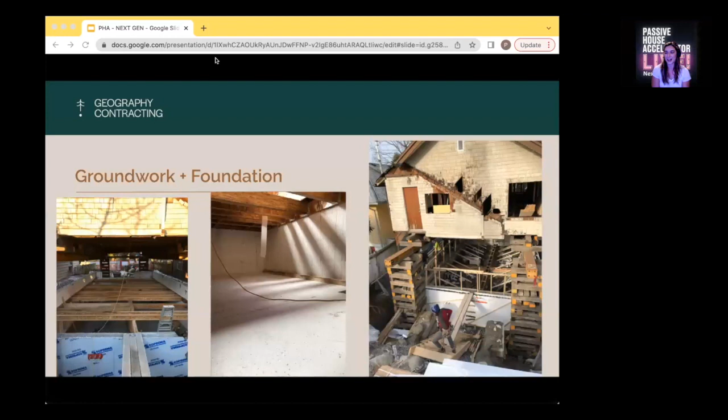15 years of experience and a background in environmental science, Paul brings a wealth of knowledge to his industry. He is a licensed British Columbia builder and active member of Vancouver's Home Builders Association and Passive House movement, implementing healthier building standards that benefit the community. Paul approaches every project with care and works closely with clients to make sure their home fits their lifestyle and needs. So with that, Paul, please take it away.

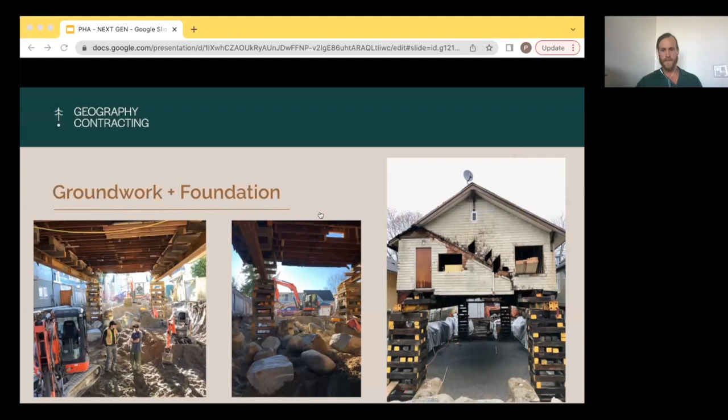insulation going in. And our slab, in this case, was one strategy of reducing concrete, which has a lot of embodied carbon in it. So we actually used a plywood slab, a 2-layer plywood slab, as opposed to concrete. So we had to ensure the substrate below the EPS was super flat, so that the foam went down super flat, so that our plywood could lay down without bouncing all over.

But yeah, we thought that was a really cool way, because it was a non-structural slab, to remove concrete out of the picture and use plywood instead. And then the third photo there is, I believe, on pour day of the foundation. So you can see the house kind of floating above.

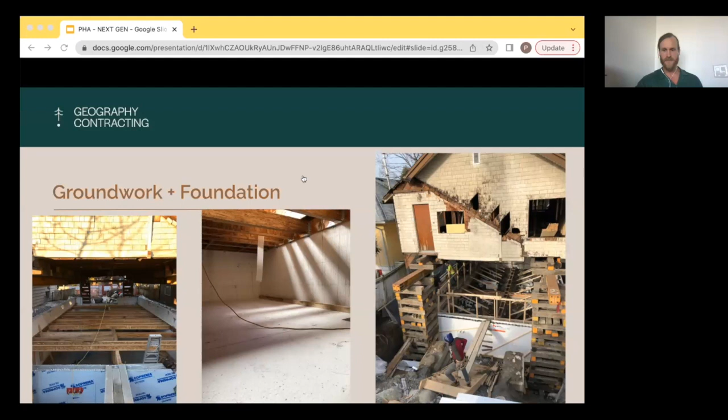Yeah, so our structure upgrades and layout changes. Turning a single family home into a duplex that would be home for 2 young families was a challenge, but we managed to squeeze 3 bedrooms and 2 bathrooms into both units while maintaining a living space that felt spacious and open.

Vancouver has a definite lack of real estate options that fill the gap between condo living and single family homes. So it's always good fun to be able to add density to neighborhoods that typically don't, and kind of fill that gap.

Yeah, so to accommodate the new layout, the structural changes were pretty big. No part of the house remained untouched. But as we deconstructed section by section, we were diligent about keeping any framing material that we thought was good enough to reinstall back into the house.

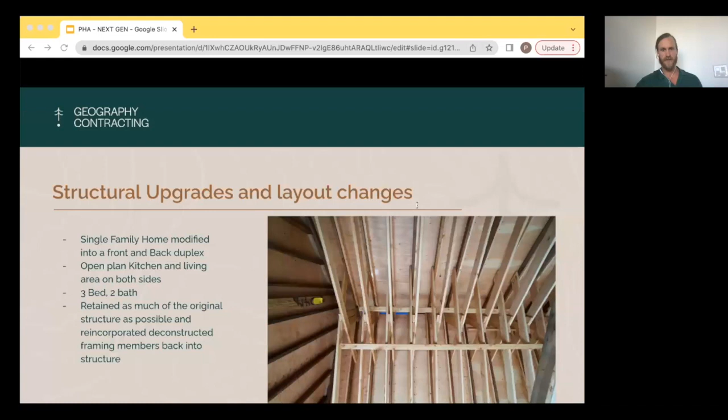So you can see in this first photo, new wood living harmoniously with old wood as we'd pull it out, and then where we could, we'd add it back in, to pay tribute as much as we could to the old structure. And here are a couple more photos of that technique.

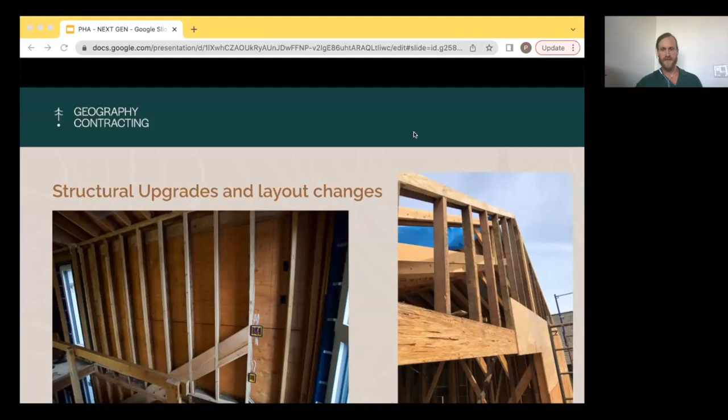Yeah, so for the EnerPHit, our envelope strategy was very typical, very similar to what we do in a new build. So here it was 2x6 framing. Usually we're 2x8 in Vancouver with a new build, but we were 2x6 with 4 inches of exterior mineral wool. We used a self-adhered membrane, which acted as our primary air barrier strategy as well.

The roof assembly consisted of 4 inches of polyiso, and then 4 inches of mineral wool, which gave us enough R-value that we didn't have to insulate on the interior, like the rafter cavities, which is kind of nice.

So yeah, a bit of the calculations here. Our heat load demand target was 15 kilowatts per hour. We managed to hit 0.3 air changes per hour. And then we put a PV system on the roof, which produced about 7.2 kilowatts per hour for both the front and the back. So combined, it was about 14.4.

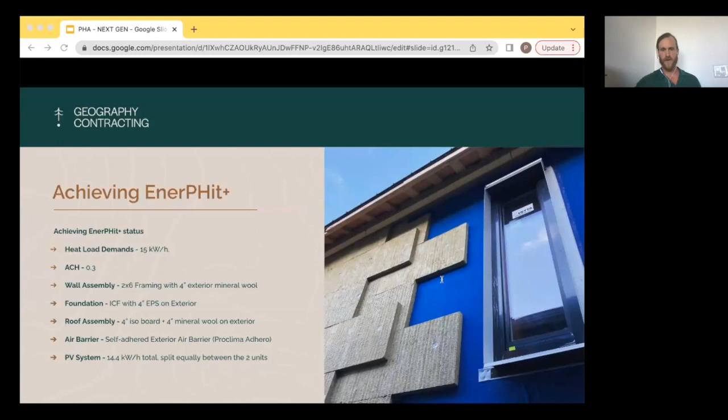And yeah, here are another couple photos of the house taking its final form, or its new shape, and putting on its new passive house envelope layers. This is my favorite part of any passive house project, because you can start to sense that the first blower door is just around the corner. So you can feel the importance of the diligent detailing of membranes and tapes, because that test is coming soon.

Our final blower door score was 0.3, which we were happy with, and very much in line with our other passive house projects. And I think it was our blower door score that sealed the deal of receiving the EnerPHit Plus designation. I think it was a bit lower than we had anticipated, which was good. And then the finished roof was a standing seam metal, which made for easy installation of our PV system, which put us into that net neutral energy consumption window.

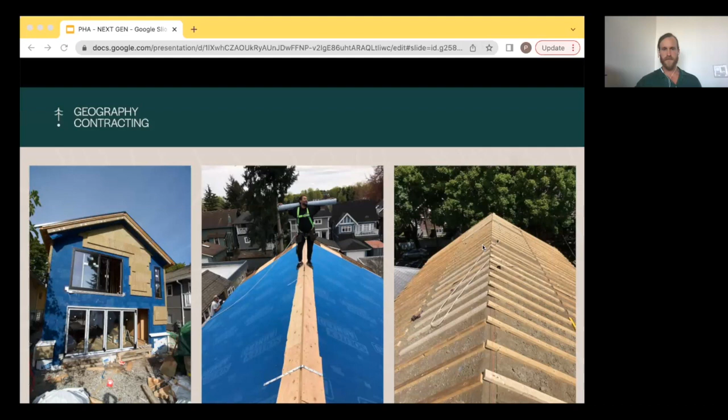So this back unit faces south. So they've really taken advantage of the indoor-outdoor feel, and we installed a 14-foot wide folding door system that floods their space with natural light. So overheating was a concern. So we do have a large canopy above the back lower opening, above that folding door. And then we installed a heat pump as well in the back unit for cooling in the summer.

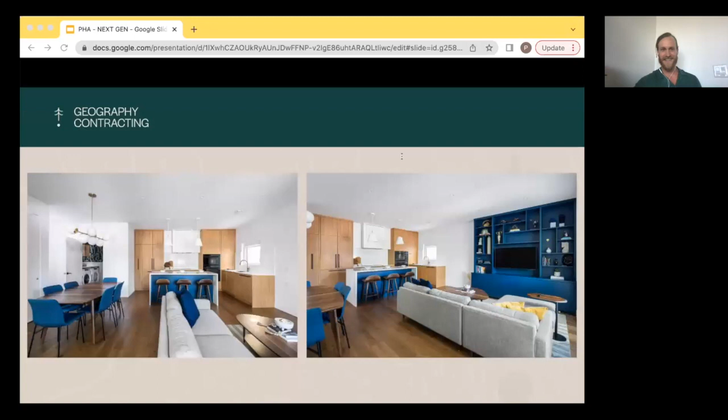So yeah, I think that the EnerPHit way of going is a very interesting and cool way of tackling the passive house requirements and achieving an energy efficient home, while also focusing on reducing embodied carbon, because inherently with a project like this, you are using less framing material. We estimated about 30% less.

I mean, most of the house was reconstructed. Starting out, we thought maybe it would be more than this, but there was a lot of reconstruction needed. The house was pretty old and in rough shape. But yeah, we still were able to save that much. Also nice to create density in a neighborhood that is majority single family homes.

And then we reduced concrete in the basement slab; we installed a 2-layer plywood slab instead, which I thought was a really great way of reducing concrete. And then, back to using as much of the deconstructed framing material as possible. We were really diligent throughout the process of setting everything aside and then reinstalling as much as we could as we framed back up. And then the PV system on the roof got us to the point that we were essentially net zero with the build.

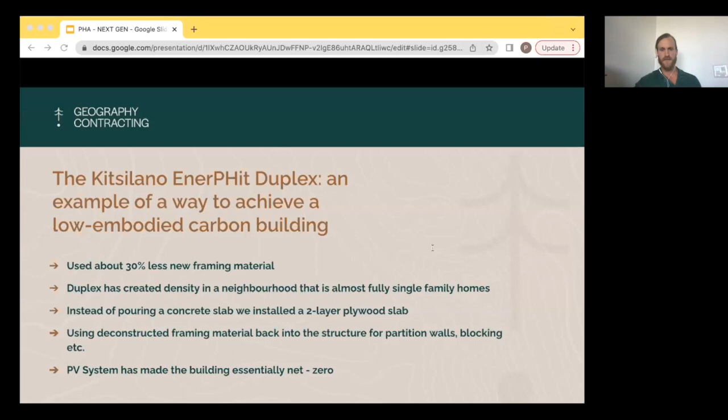So that's it for the EnerPHit portion. And I want to touch briefly on a project that we have coming up. We actually just broke ground on Monday, so that's exciting. This project won't be a passive house, but a lot of passive house principles will be used in its construction. But we are putting a lot of focus on sustainability and embodied carbon in the materials we choose.

So our wall assemblies in this house will be 2x6 framing with reclaimed wood. We're trying to source as much reclaimed wood as possible for the wall and the roof assembly. And then the cavity insulation will be sheep's wool insulation, with wood fiber board insulation on the exterior. And the exterior cladding will be made out of reclaimed framing lumber as well. It'll be an open cladding system.

And it's a technique that I'm actually borrowing from Arthur Lowe from Insightful Healthy Homes. They've recently done a cladding system like this on one of their Living Building Challenge houses, and it looks incredible. So really the focus on this is embodied carbon. We think tackling a wall assembly and a roof assembly like that will be a really cool way of doing that.

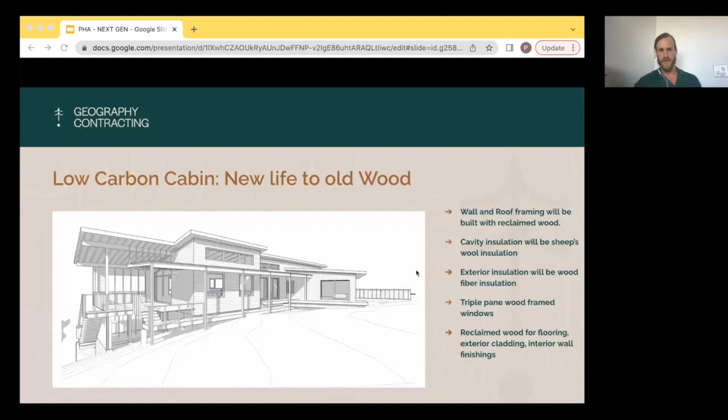And then inside the house as well, we'll use as much reclaimed wood for the finishings, flooring, interior wall finishings, as much as we can there. And another interesting thing we're doing on this one: first of all, we're doing very minimal excavation on the project. It will be set on bedrock, so we've designed the house to kind of float above the bedrock.

And you can see there, that red triangle down there, we've got a bit of a crawl space basement. That red space runs about 50 feet, and that's the only excavation on the entire project, removing a bit of bedrock. And then we're actually going to use that excavated rock inside the concrete foundation to create a rubble wall foundation.

So it still will be concrete, but we'll have slightly thicker walls, and we'll use a lot of that rock as filler, which will then hopefully somewhat expose it on the exterior side. So you see a bit of that rock coming through. So we think that's kind of a cool way of using a material from the site and also reducing concrete usage.

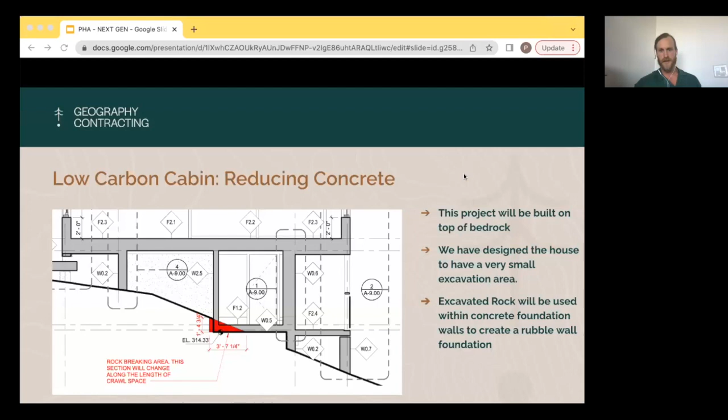Thank you so much, Paul. This is really cool to see projects that are taking embodied carbon and embodied energy and incorporating it in the design, and in retrofit nonetheless, from the very beginning. So that's really exciting. Everybody is very excited about a lot of these different methods, and they want to ask you about things. First, I'm going to turn it over to Sean, though, because I know he's seen at least one of these projects, maybe both, in person, and has a couple of things to note about them.

Yeah, for those that need more of this or are in the Vancouver area, either let me or Paul know, because he's done some amazing work. We didn't do it in the Passive House open days, but we typically do a bike tour, and Paul's two projects on East 41st, where he talked about the sibling rivalry, actually created two beautiful passive homes that were under Paul's supervision, and we'd definitely like to showcase those. So hopefully in the next few weeks we might be able to put together a summer passive house bike tour on what I call the unofficial passive house Street of Dreams here in Vancouver, where we can showcase Paul's great work.